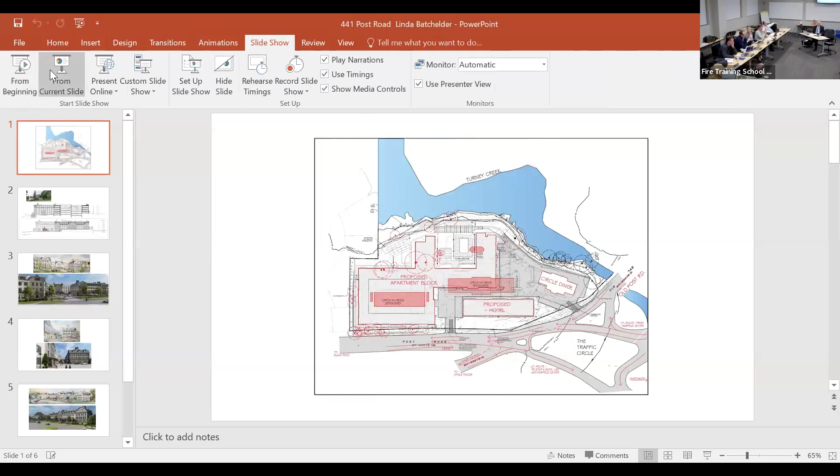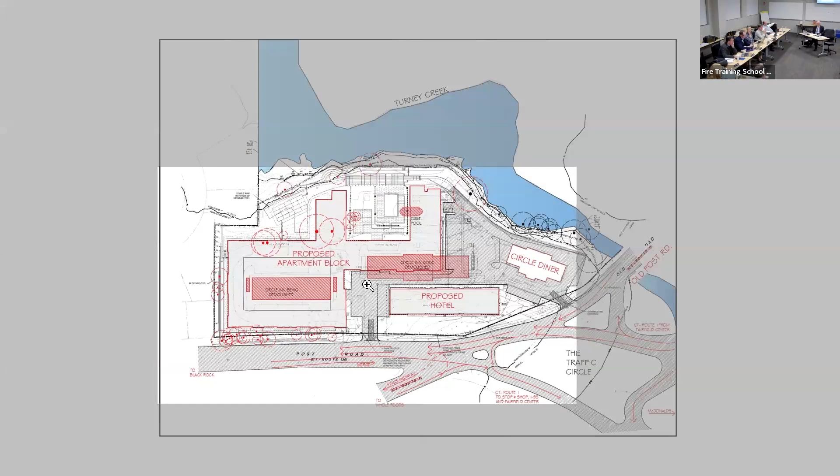But you say you haven't studied it. Is that correct? You're saying eliminate it, but you haven't studied it. What I'm saying to you is there's nothing to study if there isn't a left turn. If you eliminated the left turn, you don't have to do an analysis of it, it's not there.

I think what happened here is we are torturing a concept that we've been discussing. We've put up a diagram that's now online. Mr. Viveras, can you see that? Yes, I can. Is this part of the record? It was introduced by Linda Batchelder last week. Oh okay, I'm sorry, but it's part of the record though. That's all that matters, it is part of the record.

Thank you. So just so we're clear, do you recognize this document? Yes, I do. So when you're referring to all left turns coming out of the Circle Diner, for example, what I was asking is that is not anything on the table at the moment, let's be clear about that. Is that correct? Correct. And indeed this diagram would suggest that can't be accomplished, as all these plans are presently in the concept phase with the state.

Is that correct? Correct. Okay, so what you are saying, and again the commission will ask you questions, but what you're saying is, in your professional opinion, as the property is presently configured, that left turn, based upon the geometry and based upon the proposed increase in the intensity of use of this property, it is your opinion that it is not a viable option, having an unsignalized left turn out of the courtyard driveway at this time. Is that correct? That is correct. Okay, I think that's sufficient for now.

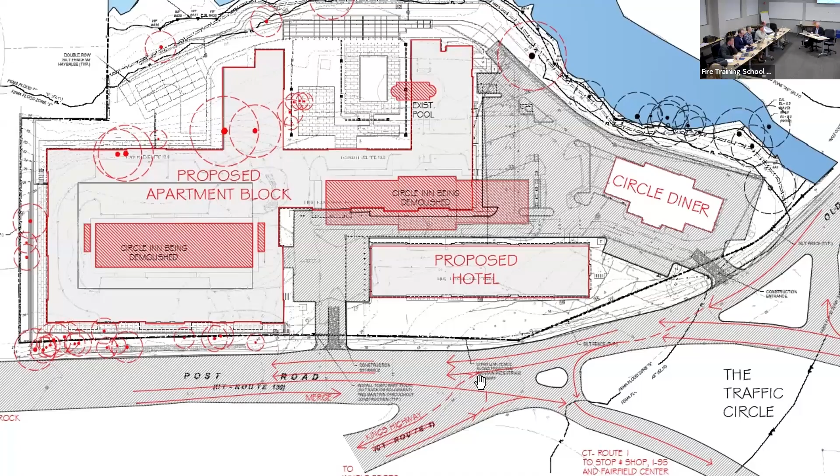And that is, so you identified this issue involving the driveway and the discussions from last week, but your conclusions in your report that is before the commission, you continue to stand by those conclusions. Is that correct? Yes, I do. And that is, once again, based upon the present time and as the roads are presently configured at the circle, in your professional opinion, the left turn out of the courtyard driveway is not a viable alternative.

Or something this commission should consider at this time. Correct. And also, it was your suggestion that ultimately at some time in the future, be it 5 years or 10 years out, there is potential for intersection improvements based on some of the concepts that have been introduced, but we are not there at this time. We are not there at this time, no.

I don't know if the commission has any further questions. Further questions at this point, or can we move on? I have a question. Go ahead, Commissioner. Hi, Alexis Harrison here, I'm remote.

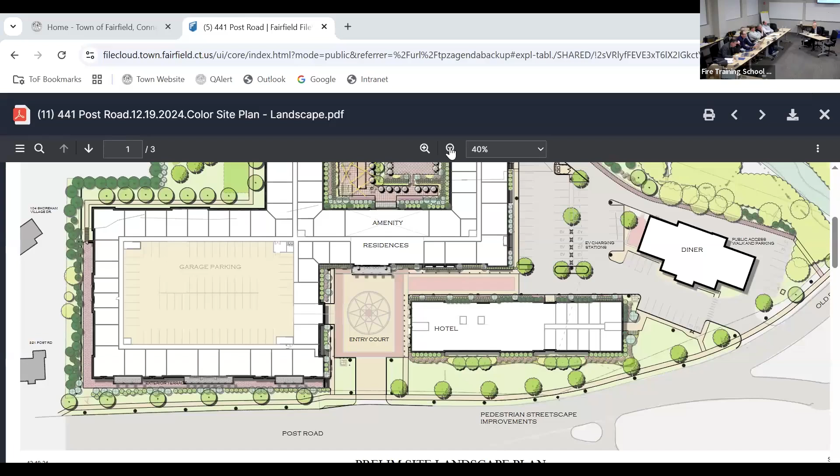Mr. Fino, are you with us? He is there. His name showed up. Hello, can you hear me? Can hear you now. Okay, good. Sorry, I was trying to unmute my mic there. I'm here.

All right, so Mr. Fino, would you—I know we submitted a resume for you this afternoon, but for the benefit of the public and the commission, would you briefly identify yourself and your education, training, and experience?

Yeah, so my background is in fire service. I've been in professional fire service for almost the past 25 years. I currently am employed by the town of Stratford, my position there is deputy fire marshal. I had a similar role in the city of Milford for over 20 years, and I've been doing some private consulting for the last 3 to 4 years as well.

Thank you. So by way of introduction for the commission, as this application involves a proposed text amendment, and in the exercise of good planning pursuant to Section 8-2 of the Connecticut General Statutes, text amendments provide the commission with an opportunity to consider a variety of factors and discretion in adopting and amending regulations. And I had called upon Mr.—

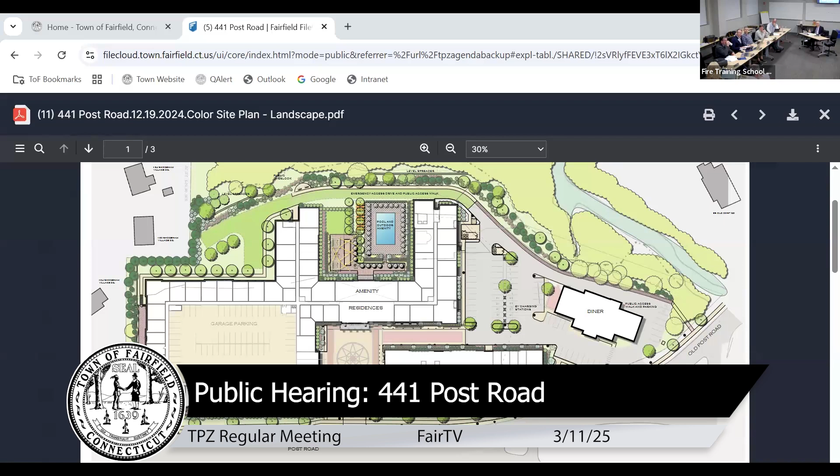Maybe if you have the drawing up, it might be easier to speak on it. Okay, so are you referring to the area where the trees are planned, southwest? Not where the hotel is? No, in front of the building, the hotel.

So if Post Road fit within that area of 15 to 30 feet, yes, you could theoretically design that as your aerial apparatus access side of the building, and there should be no overhead obstructions on the face of that building. So, to make it easier, just looking at the hotel, if we wanted to make Post Road the aerial apparatus access road, the area from one edge of that building rectangle to the other edge would have to have no overhead obstructions.

Does that make sense? I'm just asking, in plan, what would the minimum setback need to be to meet the requirement that you're suggesting the IFC would dictate? 15 to 30 feet for the leading edge of that road.

So are we suggesting that every building in the town needs to be 30 feet back from the power line for every new building? No, not necessarily, because you could make the aerial apparatus access road any other side of the building you're building. And again, we'd only be talking about new buildings, not modifying existing developments, correct? So when we're looking at a new building...

Could the courtyard meet that requirement in this plan? Possibly, but for the back, if we're looking at the apartment building, the area behind the pools and amenities, I don't believe that's wide enough and it's too close to the building. So it could maybe be redesigned to meet that requirement, but as it's sitting on the drawing we're looking at, it wouldn't comply.

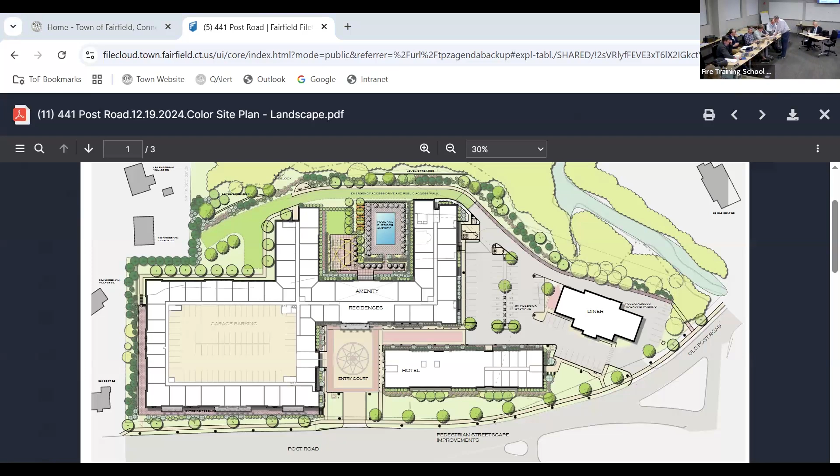I just remember that any comments anybody had on the code review were either going to be addressed or addressed, and he noted that. You can see it in the record, he notes however many, 1 through 19 it looks like. I'm not going to go through them all, but I just remember the applicant saying that all the things were addressed.

Is there any issue, as far as you can tell, with the current code that this plan violates? I didn't ask Mr. Fino to review the current code. Okay, that's fine, then I'll retract my question, if he's not ready for it, or if that's not what he's being proffered for.

It just seems to me that this commission is being asked to do something we've never done in Fairfield. We have a project with a 110-room hotel and 250 residential units and a restaurant on a single site. You're being asked once again to amend your regulations to allow development of this scale. It seems to me we've identified issues, and maybe part of this process should involve consulting the fire marshal, to see if they would favor incorporating some access requirements for aerial equipment when we consider developments of this scale. We can certainly ask the fire marshal directly in our own capacity, and I don't think there's anything wrong with that. But I'm not sure it's fair to say it didn't come up in code review, so.

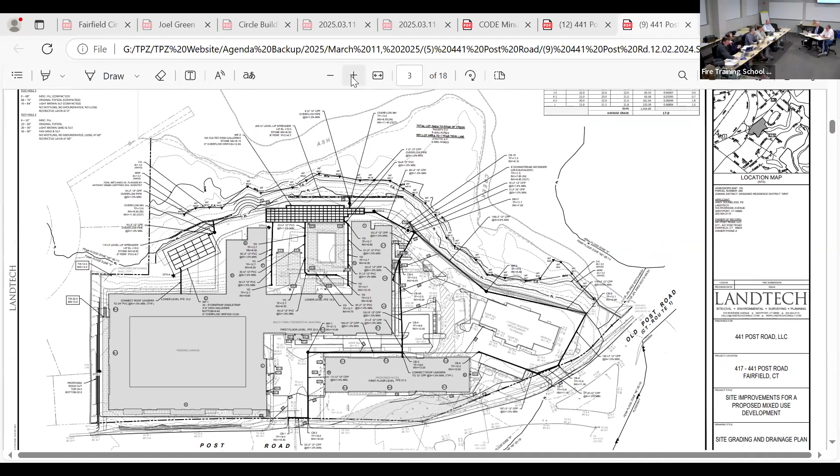Stop you for one minute. And it's not been proven because there's been, I guess, not sufficient test pits and they have not done infiltration testing. So if I can just confirm, infiltration testing. Okay.

So these galleries consist of, and just for the benefit of the commission, for the benefit of the public, these galleries basically consist of concrete chambers, correct? Concrete boxes. One is concrete and the other is the plastic Cultec systems. And they have either open or permeable bottoms, is that correct? They both have open bottoms and there's generally 6 inches of crushed stone underneath the bottom of each of them.

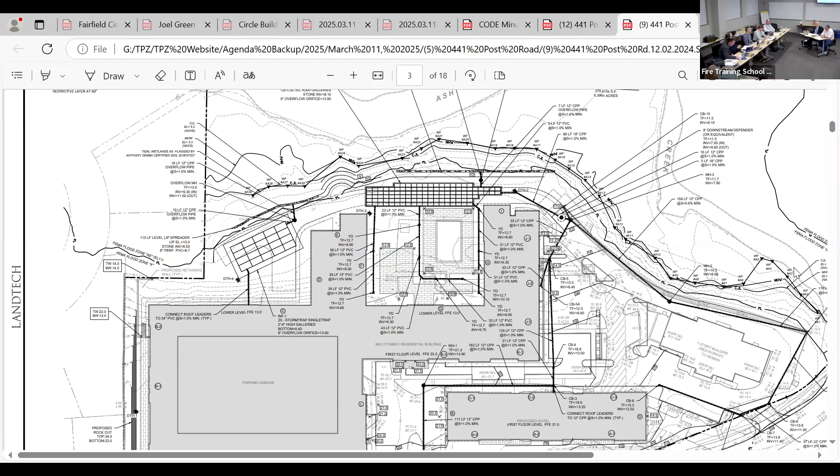And what is the separation distance that you need to establish underneath those systems? 3 feet from the bottom of the gravel layer to seasonal groundwater. Again, with their test pits, they do not call out mottling or groundwater. I don't know if your engineering department witnessed the test holes at all, but as it's written on the plan, you have to accept that they probably do have a 3-foot separation, but again, we don't know because I don't know if anybody witnessed it.

So a question for you though, because 3 feet I think is the best practice. Is that what Fairfield follows? I don't think Fairfield has its own standard for that, so it would default back to the state manual. So in theory, there's analysis done that shows that there is at least 3 feet of vertical separation between the bottom of those chambers and groundwater. And that's to accommodate the infiltration of water underneath that chamber.

Correct. The infiltration chambers for stormwater function really almost identically to how a septic system works. Septic systems only require an 18-inch separation because we're talking about a lot lower volumes of water, but you need to be able to infiltrate into an unsaturated zone. If you're too close to groundwater or you're in groundwater, there's no infiltration that will occur. So it's a separation to allow the water to be able to move into the soil, assuming you demonstrate that it can.

And in this instance, and can we get that site plan back up? Yep.

So you're suggesting that those two systems — one receives stormwater from the diner portion of the property, and the other receives stormwater from the residential building. Is that your understanding? Yes. And what specifically are you referring to in terms of the lack of testing in those areas?

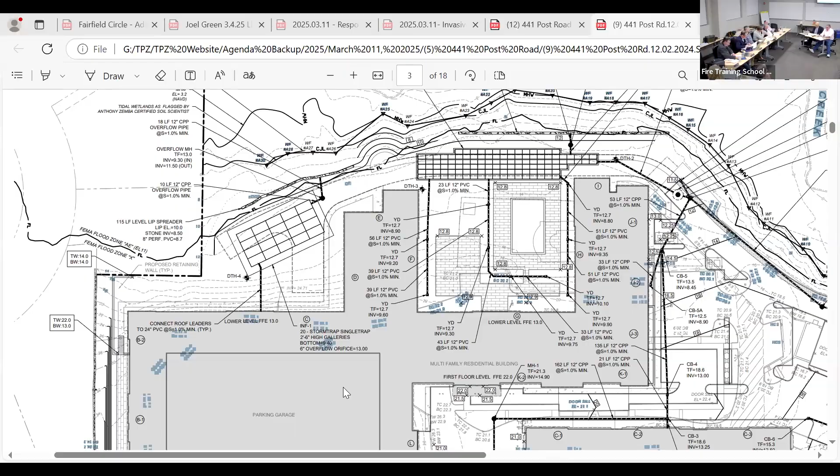Would you highlight paragraphs 7 and 8 of your letter to the commission? Comment number 7 talks about what the removal efficiencies are based on both UNH and the American Society of Civil Engineers. A catch basin with 48-inch deep sumps will remove about 9% of total suspended solids.

I think the original proposal were 24-inch deep catch basins, which only remove 5% of total suspended solids. It does nothing for metals or hydrocarbons. It may get about 6% phosphorus, 0% nitrogen. Online separators: total suspended solids are 29%, hydrocarbons 42%, metals 26%, nitrogen and phosphorus 0%.

So before we even get to the stormwater quality manual, is it your professional opinion that that is insufficient? Yeah, the design is insufficient to address the non-point source pollutant loads. You will have increased discharges of these non-point source pollutants into the tidal resource.

And then we can talk about the best practices as identified in the stormwater manual in paragraph 8 of your report, correct? Well, paragraph 8 states the DEP requirements for redevelopment: an 80% total suspended solid reduction, 50% phosphorus, and 30% nitrogen.

Professionally — and Mr. Logan will get into this shortly — can you comment on the proximity of these stormwater measures to the coastal resources and what the impact of being that close is? I believe the closest point of the level spreaders, which are the discharge points, are 15 to 20 feet from the tidal boundary. The gallery systems are maybe 10 feet farther back from them.